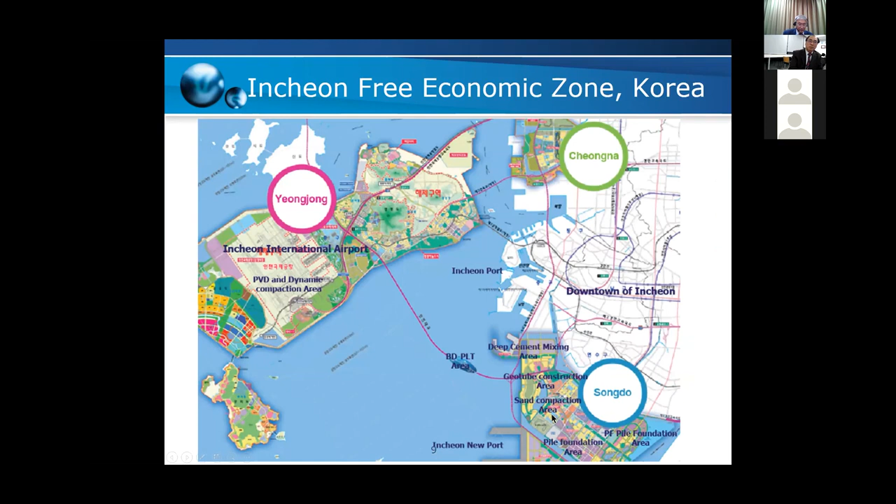We have the criteria of the soft ground here. All this area, the airport area, and the Songdo area I'm talking about, is all man-made land. We had a lot of ground improvement work, which began in 1992 and 1994, so in the past 26 years we reclaimed the land from the sea, like here. Now we have a very big dredging ship working in the midwestern part of the Korean peninsula.

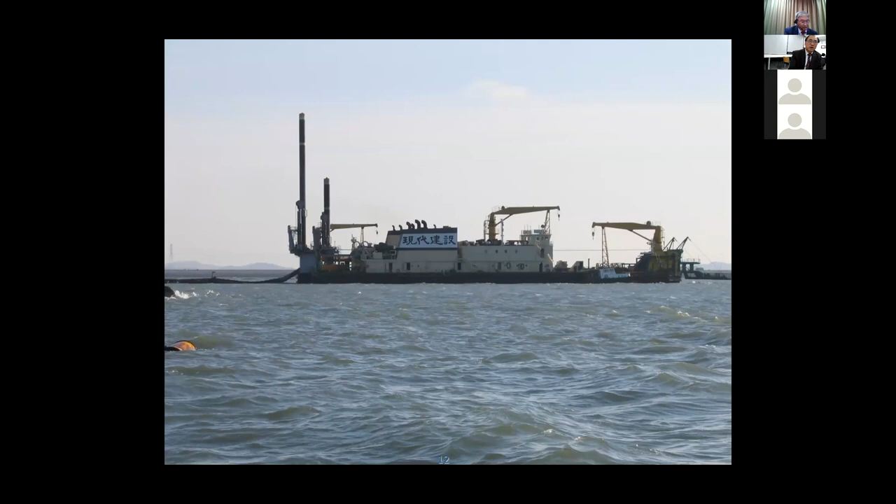We have the Saemangeum area, where we did some consultancy work. We have a lot of settlement problems in this land. This is a dredging pipe used to put the dredged soil inside the dike.

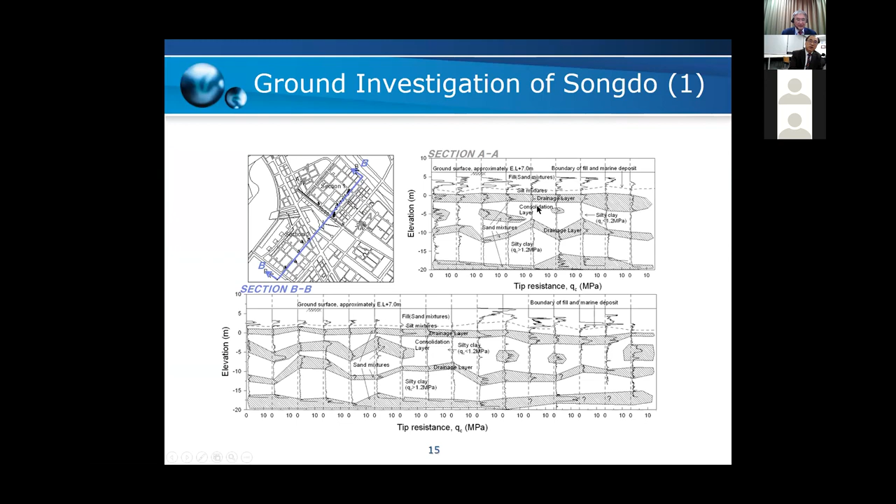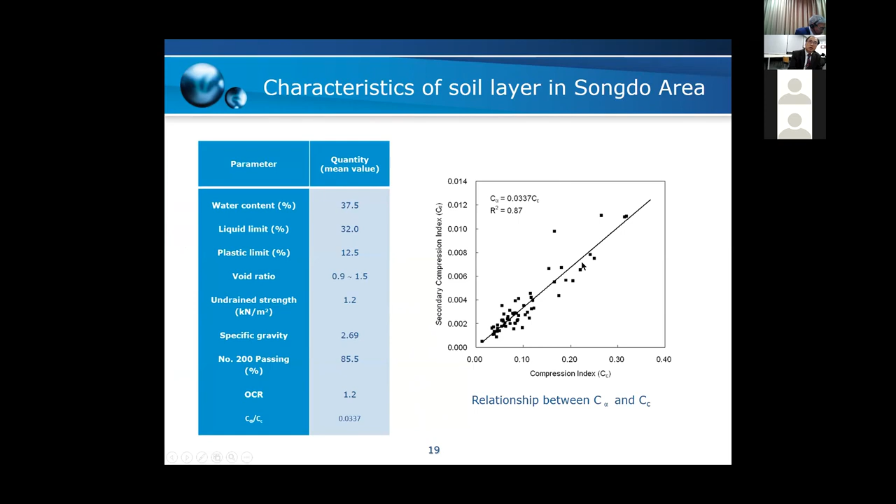So we have various ground improvement work: deep cement mixing, geotube, sand compaction pile, and special foundation systems, PHC pile, and point foundation system, and so on.

Here we have a PHC pile, high strength concrete pile, for the foundation of this northeast trading building, and we have a kind of bored pile, this is the United Nations building, the G Tower we call it, and like this. Because we are constructing in the middle of the city, we don't have any driving pile.

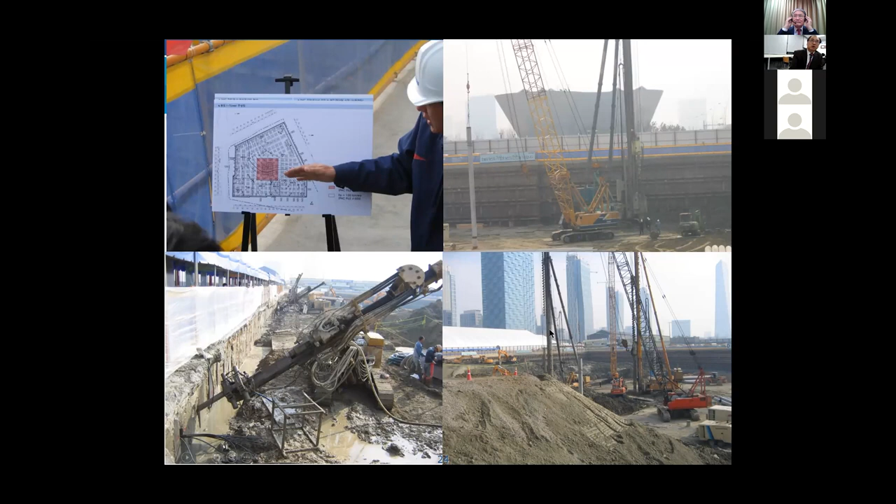So this is the water main, and this is maybe hot water heating pipe, and this is electric cable underground. So we have all this facility underground, so we cannot see any electric post above ground, and we have many CCTV cameras, so we can surveil any damage, any problem underground. So we monitor this lifeline facility 24 hours a day.

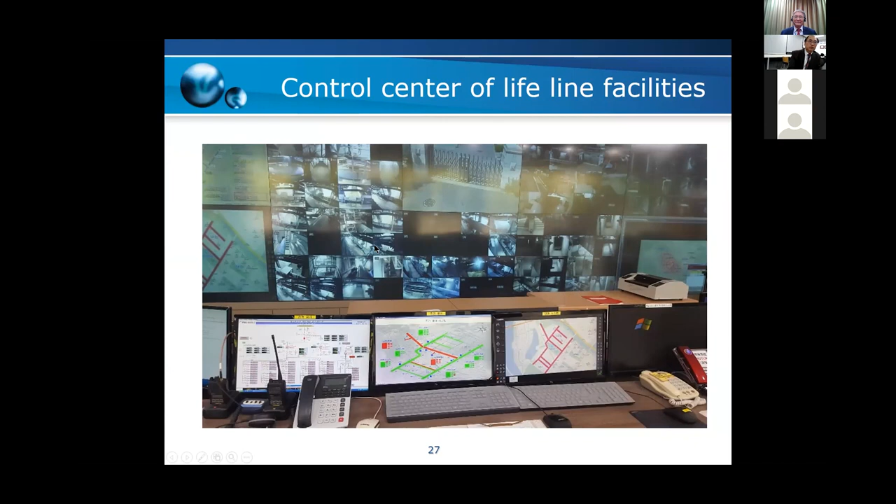So this is, and also we have several sand compaction piles, prefabricated vertical drain, ground improvement work in this area, and we ground improved, and also we have a geosynthetic clay liner at the bottom of this canal, this man-made canal.

And on top we have like a geocell. So we made an artificial slope for this particular Central Park area. This is a concert hall. And we have a pretty good shopping mall here and there, and also the international schools.

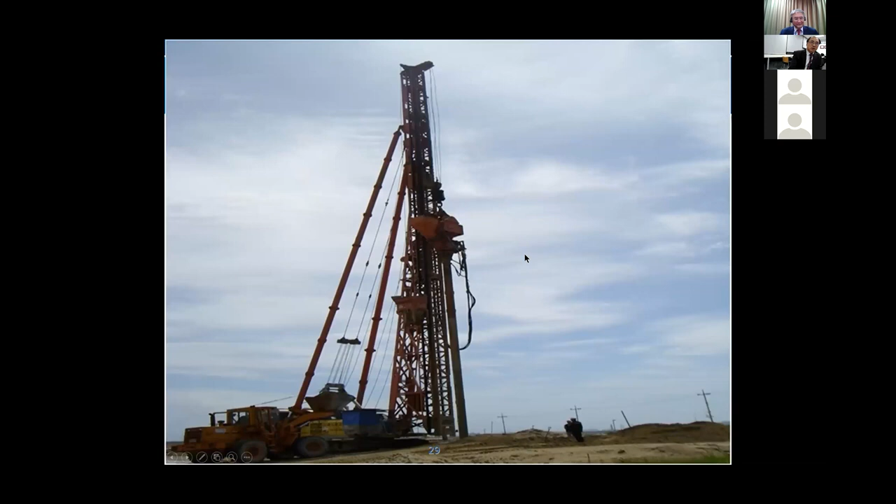And in those areas, we ground improved by the sand compaction pile. Many years ago, about 30 years ago, we learned this technology from Japan. You see the diameter about 60 to 80 centimeters, with spacing about 1.8, 1.5, 2.0 meters.

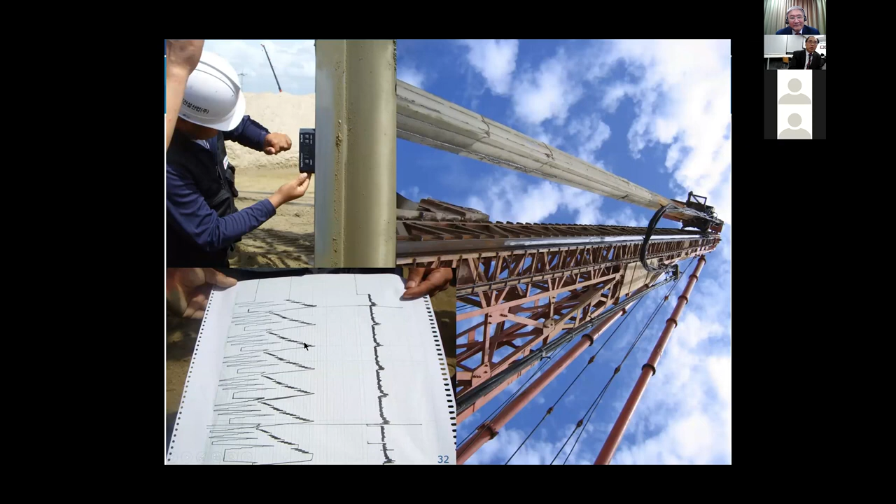And the depth of this ground improvement is around 18.5 meters average. Okay, this is the equipment and monitoring graph.

And also we used a lot of prefabricated vertical drain because of the lack of sand, because in here we have a silty sand, so not much good gradation of sand for sand compaction pile. So we use the prefabricated vertical drain and lateral, and also we used this deep cement mixing method for

jet grouting work under the station of the metro, and also RJP and JSP we used a lot for this area.

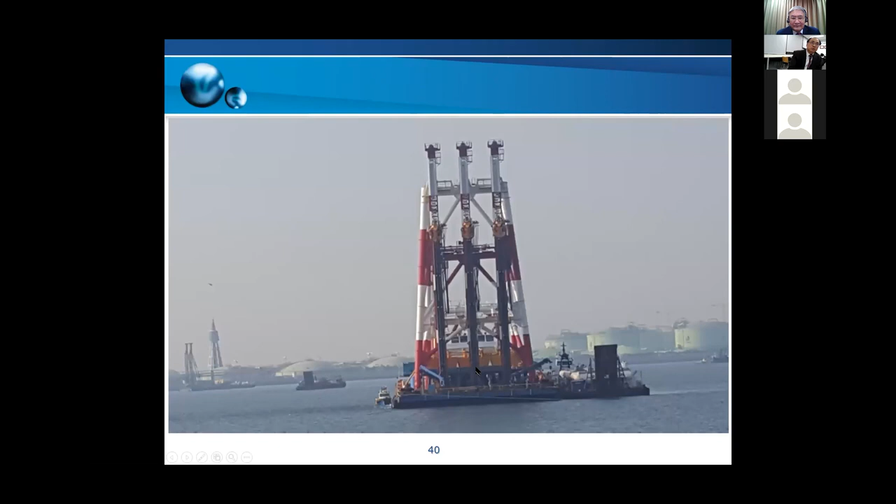Just prior to the construction of the sea dike, we wanted to ground improve at the bottom of the soft clay at the seabed, and we also have a lot of deep DCM application here.

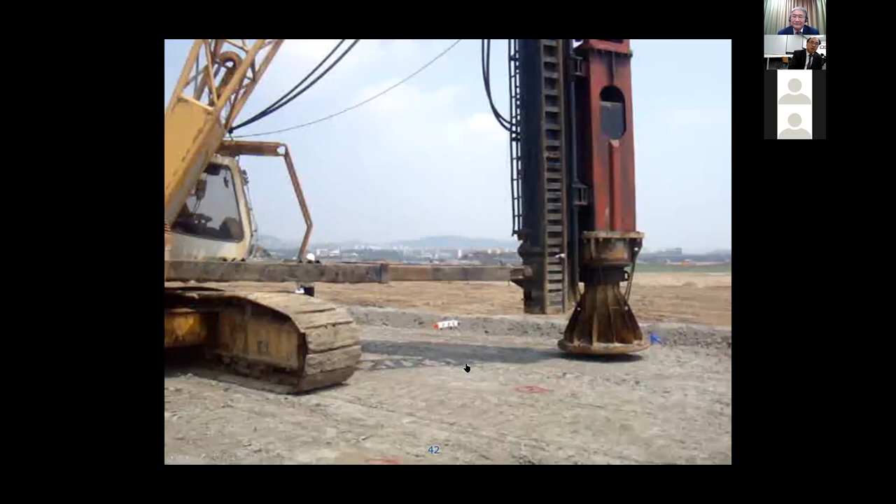This is the convention hall in Songdo, and this is a shallow dynamic compaction for the road, because deep dynamic compaction has a problem, too much vibration and noise. And here we have ground improvement of 5 meter depth by the shallow ground improvement method.

We have a point foundation along the international university campus here. We have here very simple equipment, but we have this kind of foundation. This is the tip and this is the top.

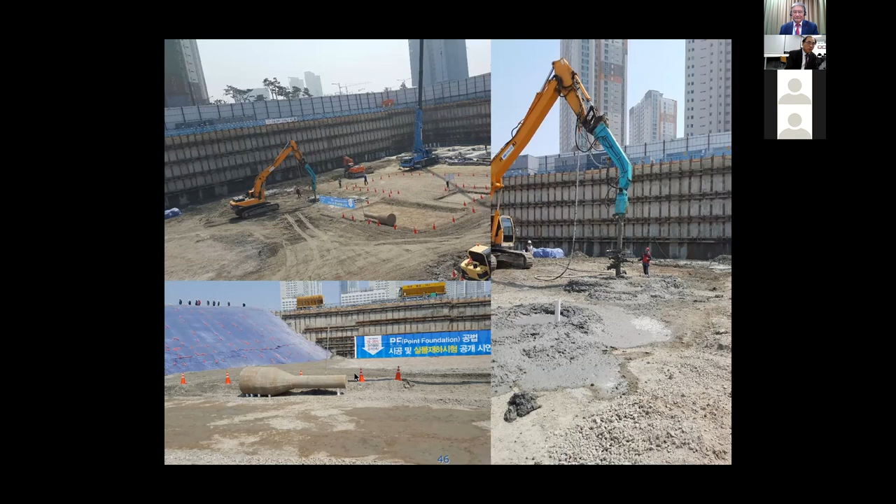Okay, so here the bearing, we normally just check the standard penetration value, about 15 to 20 blows in those areas. Now we do pilot tests over here to see the bearing capacity of this.

I think this would be very good for the foundation for the soft ground in the parking lot, and also the middle-high, low-rise apartment complex and residential area.

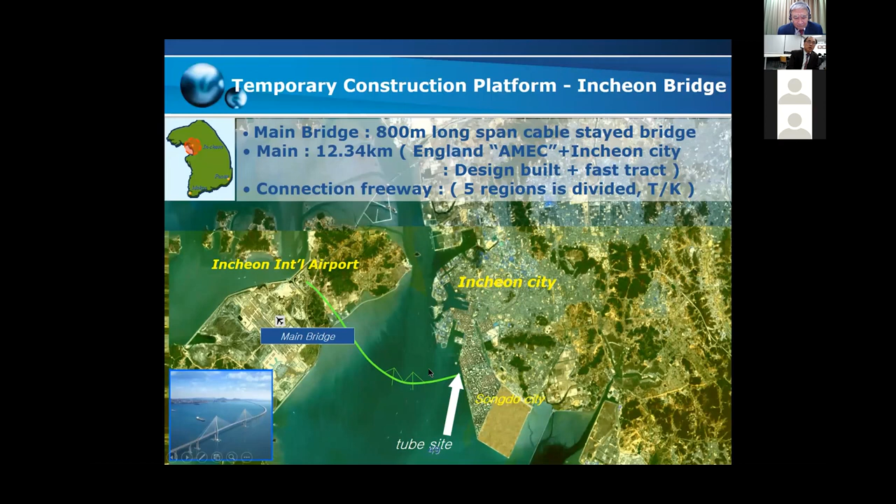This one has a conical foundation because the water dissipates during construction on the underground structure, it has a problem. We used the geotextile tube for the temporary dike for this bridge construction work, for the bridge pier and all these.

Used to be we used sheet piles to make a temporary dike, but in this case we used the geotextile tube, in 3 layers.

We monitored this and calculated the stability, the sliding, overturning, and the bearing capacity. This is the process of the construction work, the apron mat and setting, and we pumped the slurry sand into here like this. It's not very difficult.

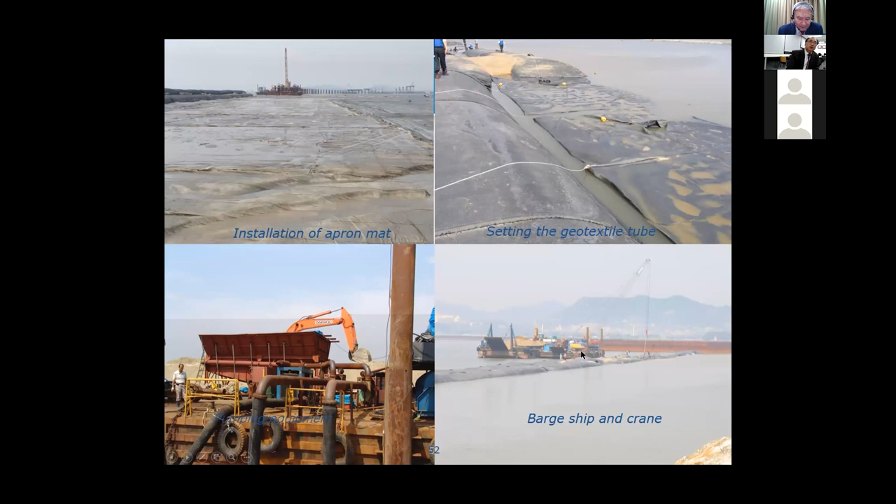Here we have a twin tube, and on top we have a mattress, and we injected cement milk to make a platform of the second layer. This was very successfully implemented, monitoring all the vertical stress and the pore pressure dissipation with the different layers.

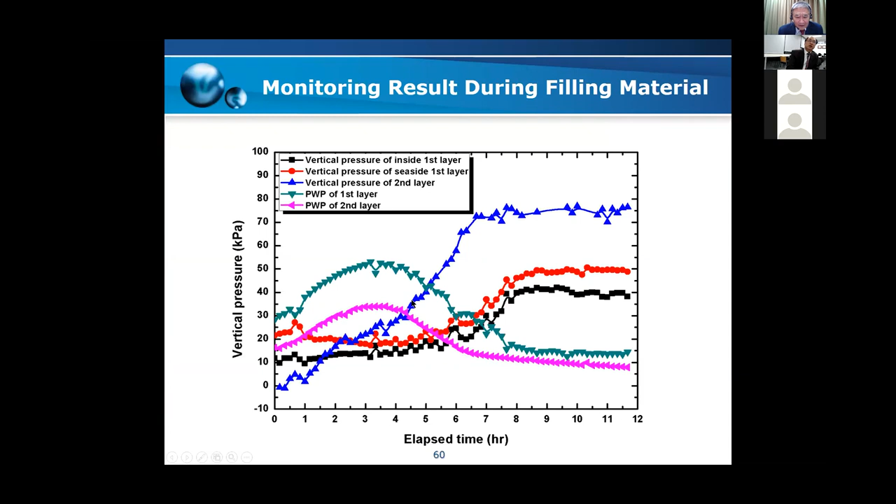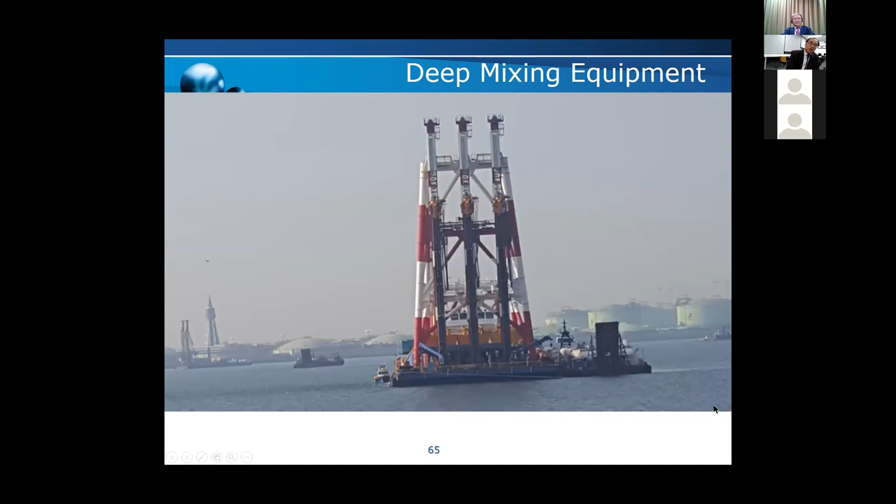This is the deep cement mixing at the bottom of the sea dike, and a secondary perimeter highway will be constructed around the metropolitan area. This is the method of the construction work.

We have two injection holes, bottom and top. When driving, we inject from the bottom, but when withdrawing, we inject the cement grout from the hole on top.

That's very efficient. This is a lift-up injection, and it's very good, giving a higher unconfined compression strength compared with the penetration injection.

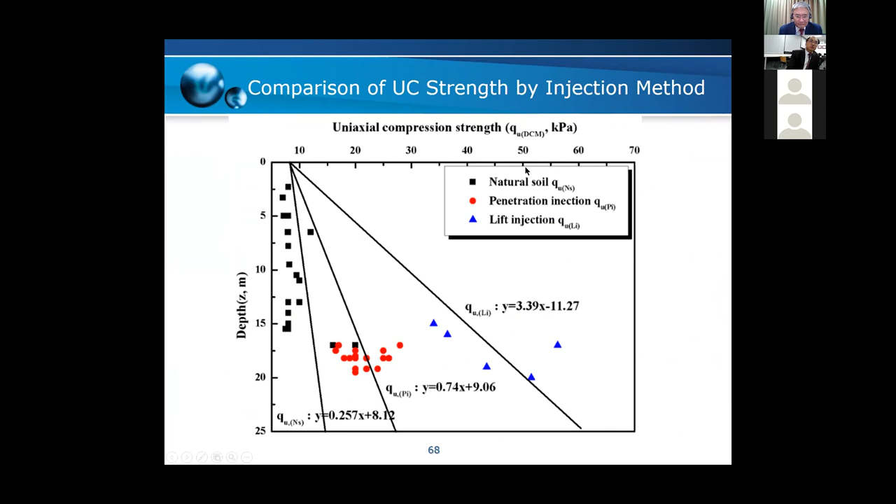The curing period is 28 days. We presented the various soil ground improvement methods, and I think we have pretty much confidence in the cost effectiveness of this method for social infrastructure in the Songdo area. I think that's about all for the presentation.

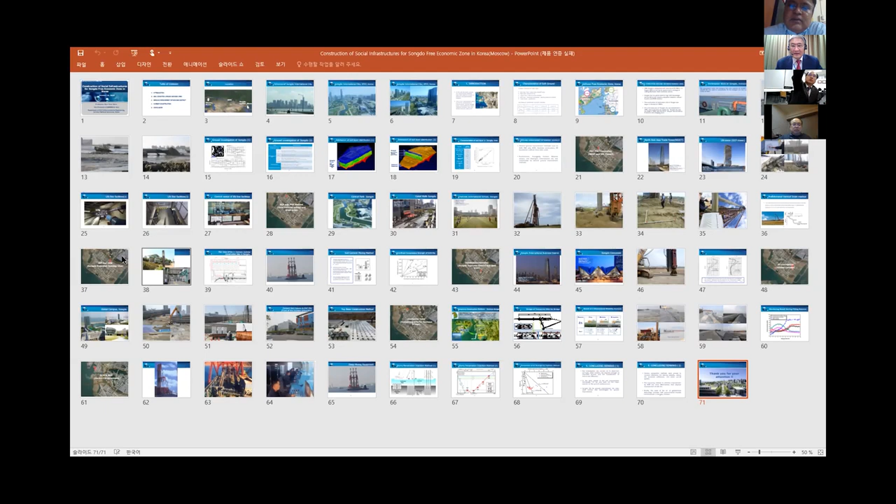Pile foundation? Yeah, we have pile foundations, PHC piles, particularly for heavily loaded buildings, heavily loaded structures.

I'll show you. We have a main contractor, right? Then they give the subcontract. They have some company that specializes, they have machines and technology to do this. So we have a special contractor, a Korean company working for this project. Whenever we have a project, we need the special subcontractor to carry out the work.

One more question. We have a ground, particularly when we have pile foundations in soft clays, how do you increase the lateral capacity?

Normally in South Korea, we have the depth of weathered rock, and it's not very deep. We have about 15 meters, maybe 10 meters, and in this coastal area, particular area, we have about 28 meters depth. So all the piles rest on the bedrock, so it's very reliable.

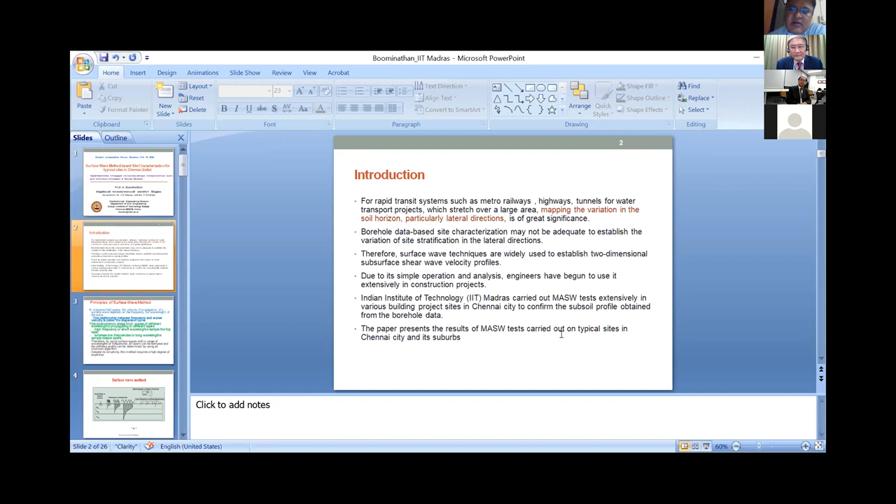My presentation mainly covers work carried out on typical sites in Chennai. Let me first introduce the principle of the surface wave method. Our soil medium is treated as an elastic half-space.

When surface waves propagate—here we are talking mainly about Rayleigh waves, or R waves—the velocity depends on the frequency or wavelength of the wave. This relationship between frequency and wave velocity is called the dispersion curve.

This phenomenon arises because when the Rayleigh wave travels, it has several frequency contents. For example, high frequency content, or short wavelength, samples the top layer. When the frequency content is low, the waves have longer wavelength and basically cover the deeper layer.

So we have waves propagating at a wide range of frequencies, and from that we can indirectly determine the soil stratification. In addition, we can determine the velocity profile, which is useful particularly for seismic site classification as well as seismic site response analysis.

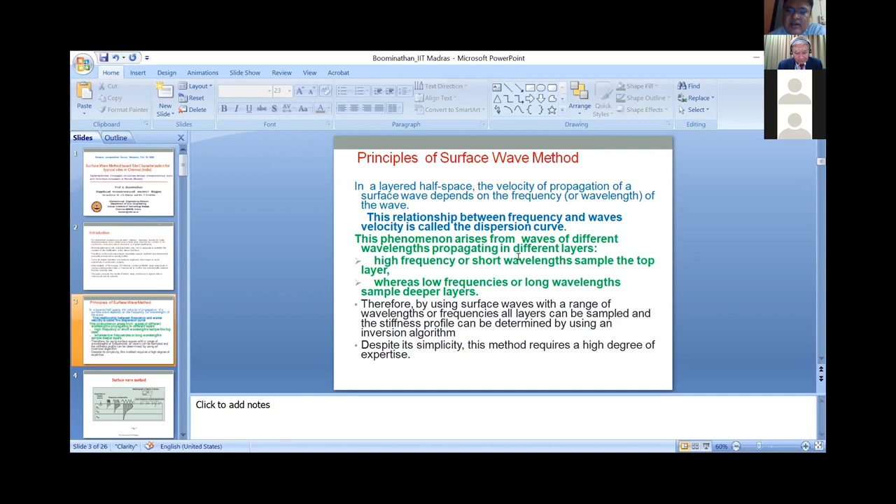My focus is mainly on site stratification. Here it's shown that the Rayleigh wave can be generated just by an impact, such as hammer blows, or an SPT hammer blow can also be used.

This wave has components with high frequency and some with low frequency. The high frequency content only covers the shallow depth layer, but the low frequency, or long wave, covers deeper depths.

From this principle, when we have multiple vertical geophones catching these waves, in principle we can indirectly determine the layer velocities as well as, importantly, the thickness of the layers. That is what we are interested in.

Practically, we are talking about how you can replace borehole-based stratification. Here you can see that this high frequency wave only covers a very shallow depth, less than a meter. But when we have a larger wavelength, it covers a deeper area. Based on that, we arrive at the stratification.

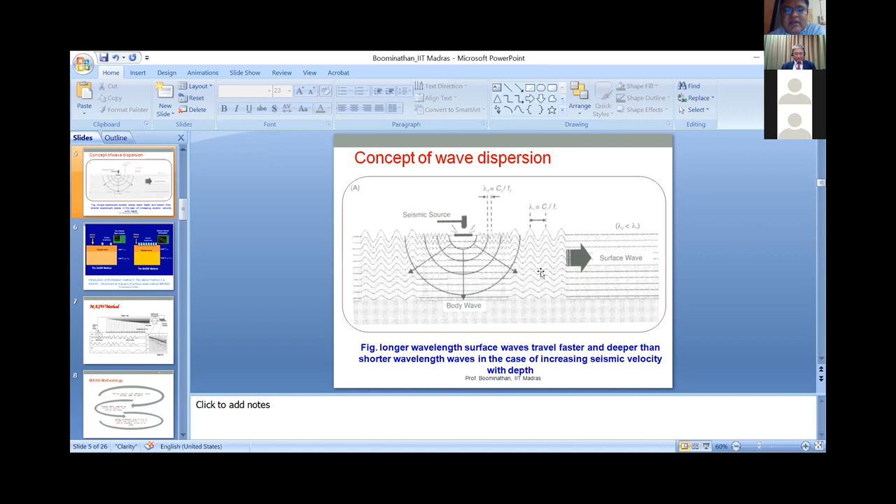This method was all developed at UT Austin by Stokoe and others. Initially, they called the test the Spectral Analysis of Surface Waves, because it is based on analyzing the wave's frequency content—hence the name.

Originally, they used only two vertical geophones and one vertical source. It was originally developed mainly to determine the quality of pavements, and only later was it extended to the geotechnical engineering field.

Nowadays, instead of two geophones, they use what's called 8, 16, or 32 geophones. Currently we are also buying a 42-channel system. With more channels, we can more accurately get the layer profile and assess greater depths. So currently we use the MASW test, the Multi-channel Analysis of Surface Wave method. Both methods are basically the same, but MASW uses a much larger number of geophones, as shown here.

So we have, for example, here typically 24 geophones. Each geophone is a low frequency geophone, for example here it's 4.5 hertz. Basically, the important parameter is the distance between the geophones as well as the offset distance between the source and the first geophone.

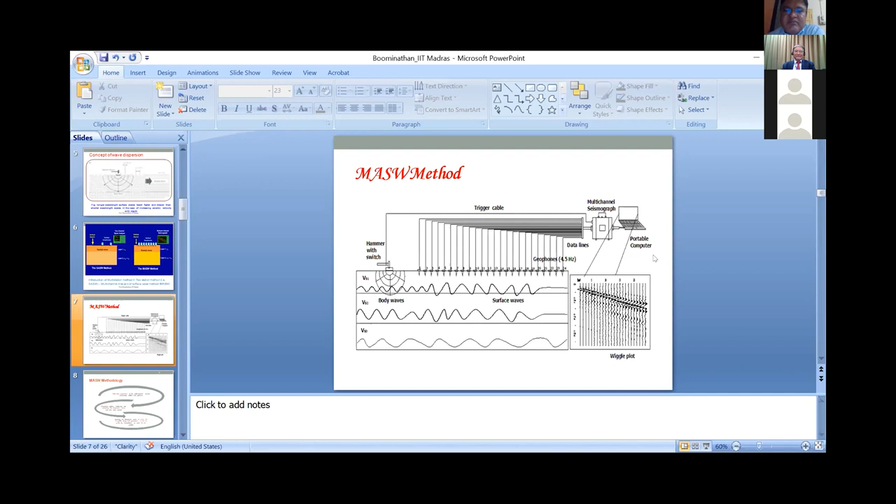So basically, in this method, first we are accessing the field multi-channel records, commonly called shot gathers. Then we are analyzing the dispersion pattern, extracting the dispersion curve we have to plot, showing the relation between velocity and frequency. Then by inverting the dispersion curve, we can get the shear velocity profile, and based on multiple locations, we can also get a 2-dimensional profile.

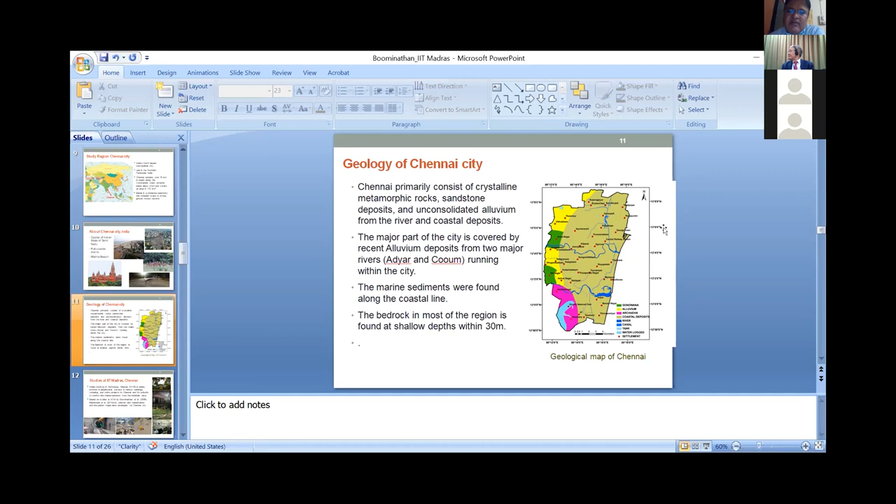We currently have our institute involved in geophysical surveys, particularly using the MASW test. We've been involved in tunneling metro projects to confirm mainly the borehole data. This data supplements the borehole data; of course, it's not replacing it, it's supplementing it.

Here, what we have done, the test was carried out for the first time in Chennai, about 30 sites, and we also collected samples and did some laboratory tests to determine the shear velocity, like the Bender element test. For all the sites we also had additional borehole data plus standard penetration test data. So from 200 data points used, we developed a correlation between the shear velocity and the SPT value.

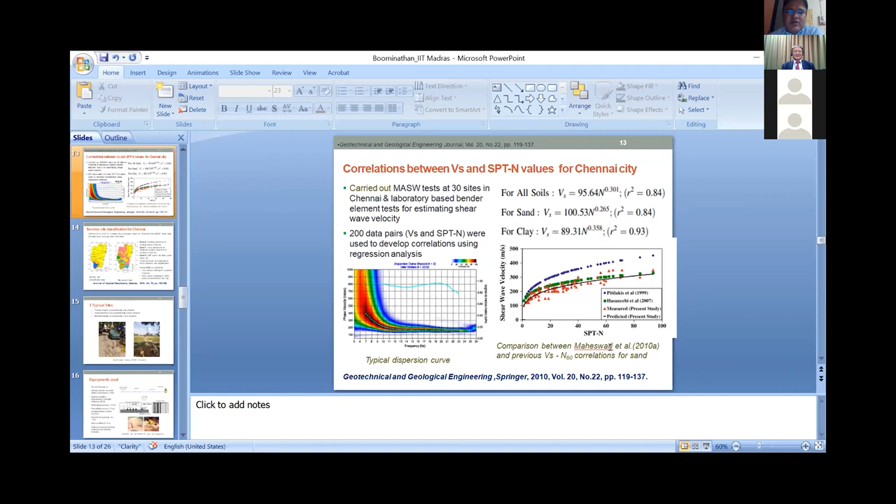So based on this site classification, we have concluded that mostly the short buildings are vulnerable to the earthquake. One single story or double story building in the southern part. The remaining part, mostly 3 to 6 story buildings are vulnerable in case of any occurrence of the earthquake.

So now after that we are involved mainly in seismic site characterization. For that we have collected data and done various tests. But nowadays our purpose is mainly to have more detail about the site profile. It's not that we are not interested in the shear velocity profile, but mainly we are interested in the site profile. For that we will be taking this particular presentation.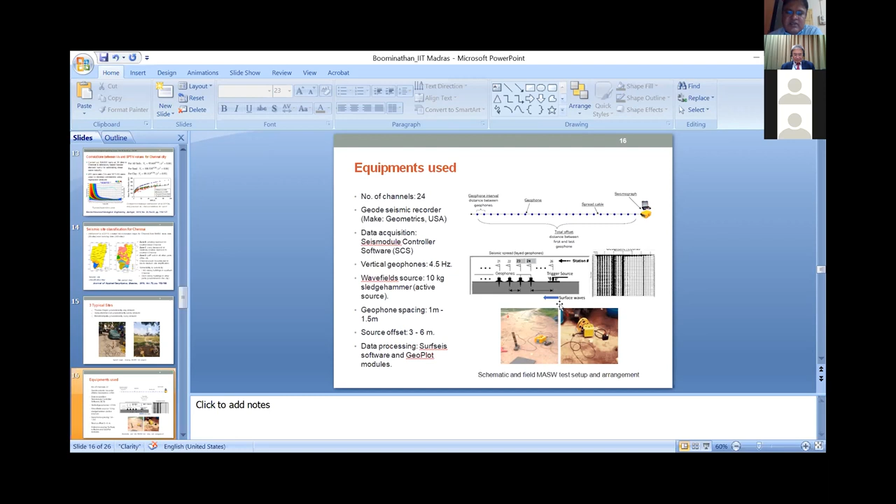Of course, all this we have to select carefully. It's not that automatically we get a good record. We have to change the spacing as well as the offset distance to get good wave data. For processing, we have used Surfseis software. Currently, a large number of software are available in the international market to analyze this wave propagation and S-wave velocity data.

So basically there are 3 parameters involved. One is the offset distance, which is the distance from the source giving impact to the first geophone. Then the distance between geophones, then the overall distance. These are the 3 distances. If you look more clearly, one is D, the other is X, and L is from the first geophone to the last geophone. The optimum and important task here is how to select these dimensions, D, X and L.

For that, there are various recommendations. The spacing between geophones should be less than 0.1 times the maximum depth of interest. In some cases we are interested only in studying, for example, pavement purposes, so we may be interested to know only within 5 meters. But for our building purpose, we may be interested up to the rock. So depending on the desired maximum depth of investigation, we can arrive at this distance. Similarly, the offset distance should be more than half of the maximum depth. Then the overall length of the geophone array should be more than the depth of investigation.

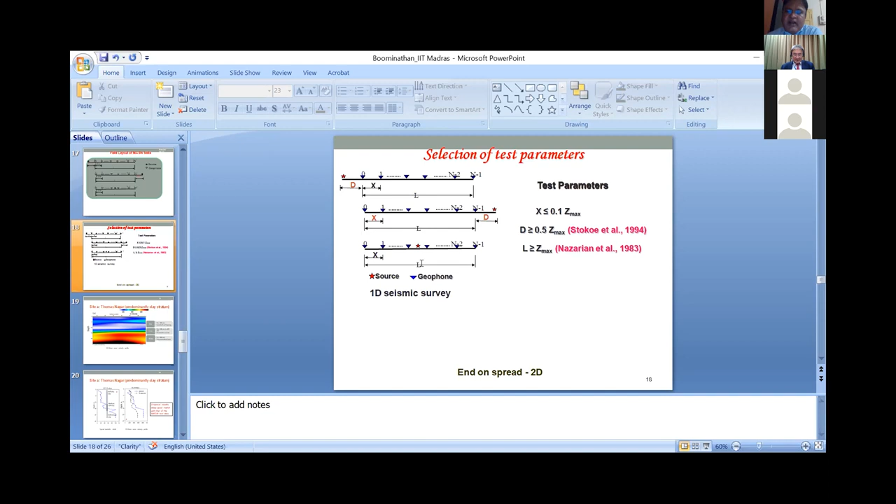So these are the considerations. There are later studies also with various recommendations, but we cannot blindly follow these. Depending on our site condition, we have to select these 3 parameters. I already told you the parameters which we used for our case.

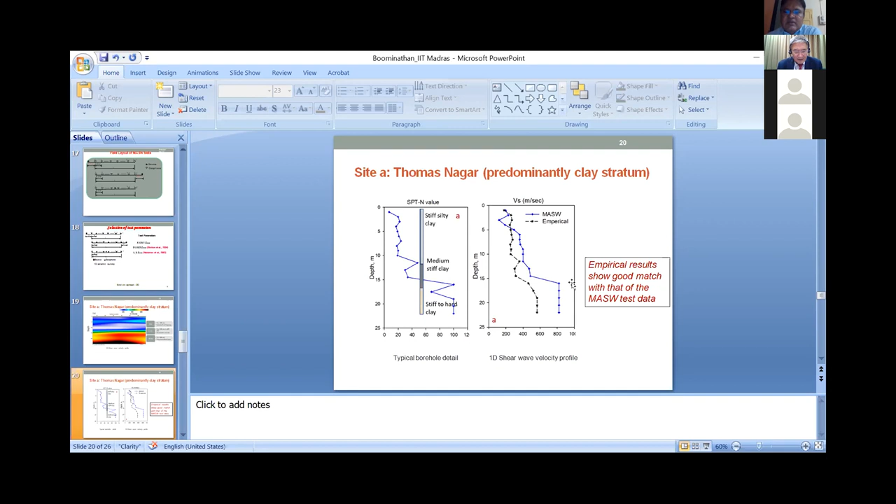Additionally, we compared the earlier correlation proposed by our group itself to see how it works. The empirical result is basically, the blue color is the test result, the black dotted one is the empirical one. It's giving results but it's not exactly matching, particularly for very stiff soils actually.

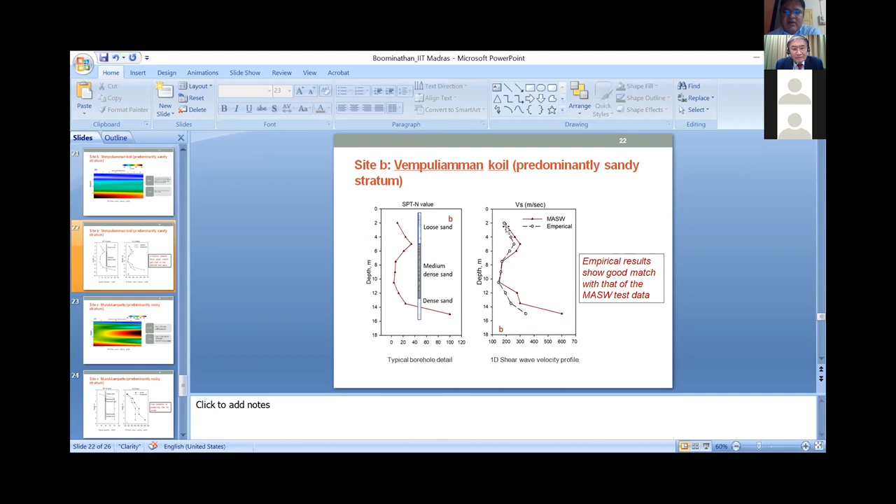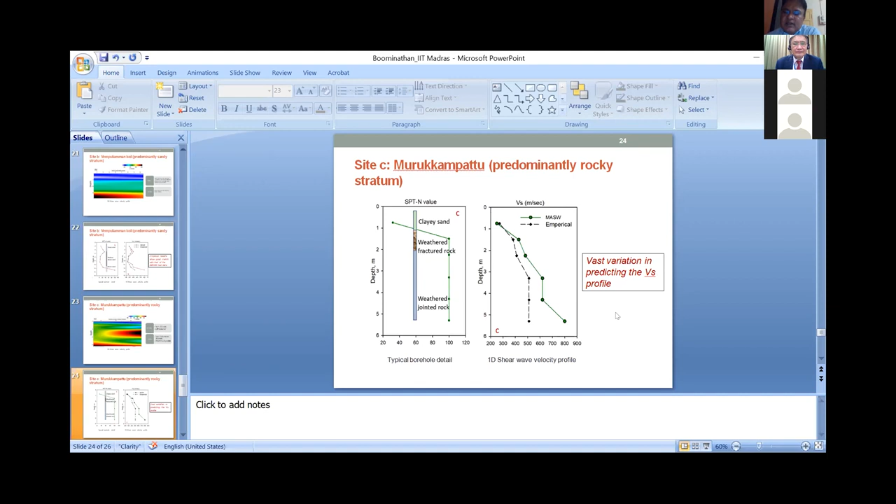So with this, I will complete my presentation.

So what we find is, for the subsoil profile obtained, this test reasonably matched with the borehole data, and it will give additional information. The existing correlation developed by our group can be used for certain types of soil, but not for all types of soil actually. Particularly for weathered rock sites, the correlation may not be applicable or adequate.

So future research should focus more on how to develop a relationship between SPT or some other parameter with the shear velocity for weathered rock, and our focus is how to distinguish. Of course, the hammer blow energy may not be adequate. Further, we may go for high energy impact systems at commercial level to reach greater depth, so that even beyond weathered rock, we can reach the hard rock actually.

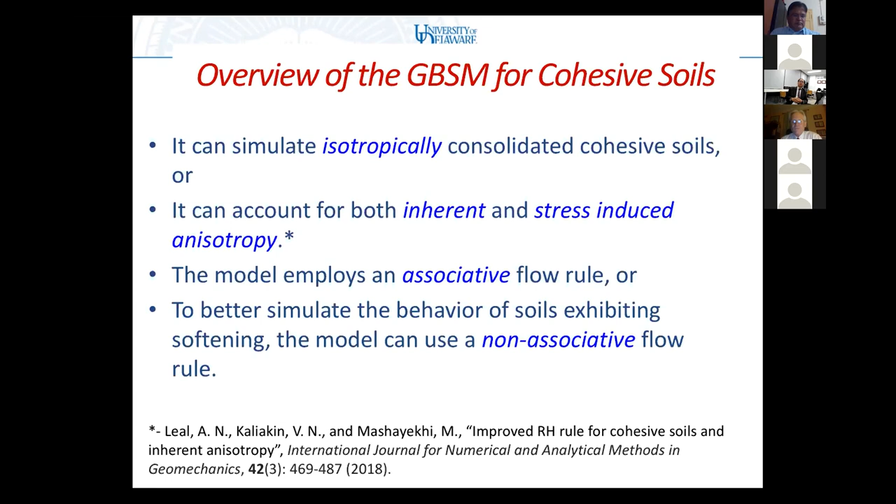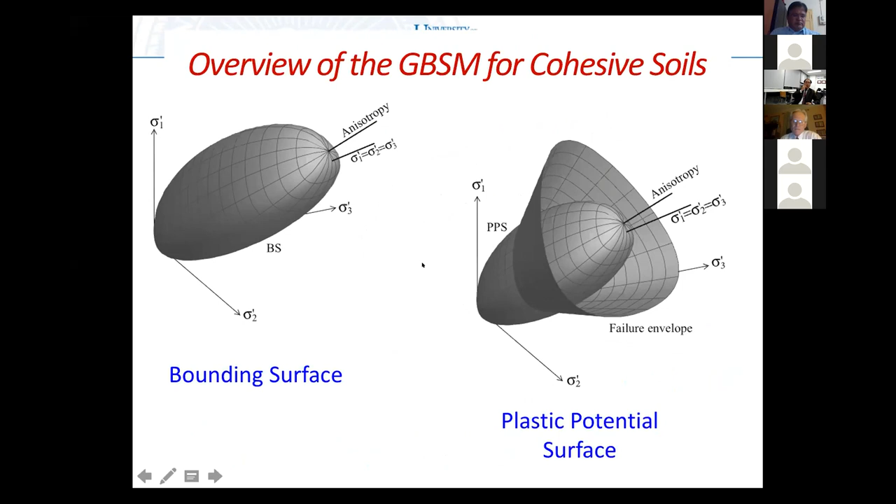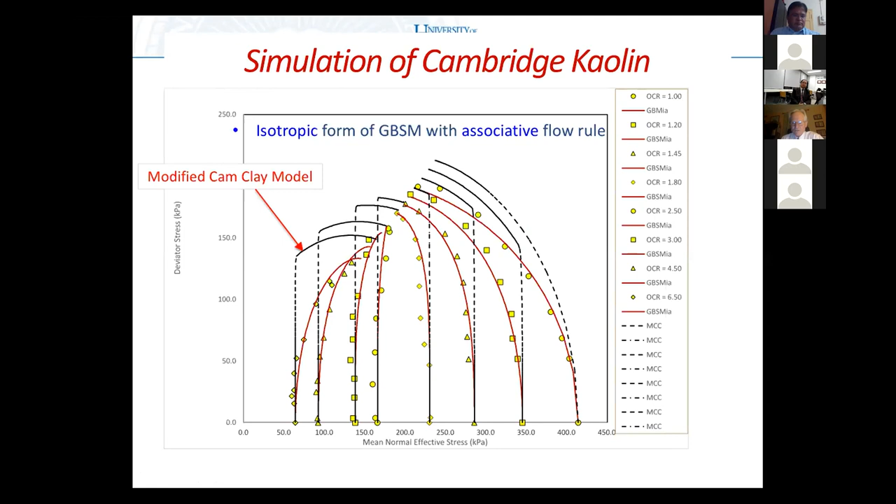Now, that was a simple soil. Let's look at some more complex soils. Boston blue clay is a famous soil in the Boston region in the eastern part of the US. It's marine silty clay, and it exhibits strain softening.

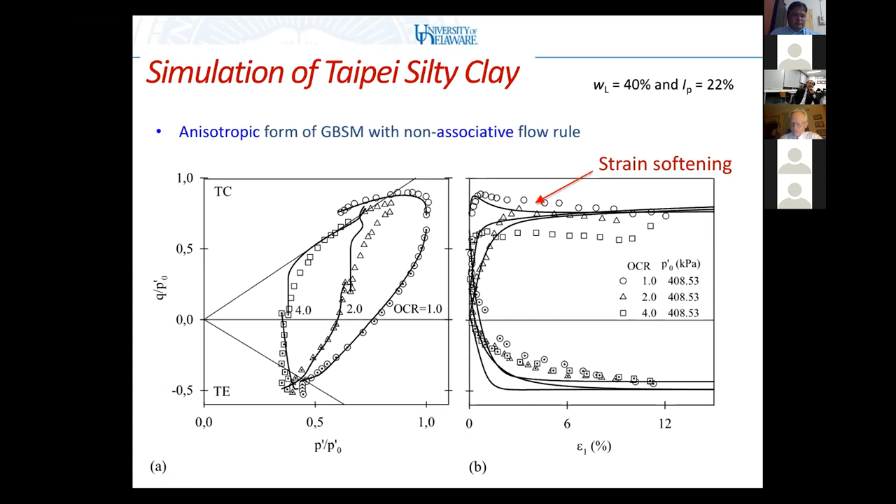Now, the interest in the elasticity response is motivated by recent work, maybe over the last 10, 15 years, on tunneling. In tunneling, small strains are very important, as shown by numerous authors. So the definition of your elastic response assumes greater importance in such applications, tunneling, and also certainly in foundation work.

So we look at the existing relationship between stress and volume change. Volume change is done, of course, through void ratio, E. Here is the classic critical state concept of E log P curves, where P is the mean normal effective stress. The slope of the virgin consolidation line is the negative of lambda, and the slope of the swell recompression line is the negative of kappa, a classical kind of approximation. We use the same type of approximation in our work.

Traditionally, we decompose the rate of void ratio into elastic and inelastic parts, the inelastic being both plastic and viscoplastic. From the previous plot, we know that the change in the elastic piece is related to the change in the first stress invariant, I, which is 3 times P, through kappa. In the limit, when we take derivatives, we have the log entering, and then if we take rates, this is just equal to negative kappa I dot over I.

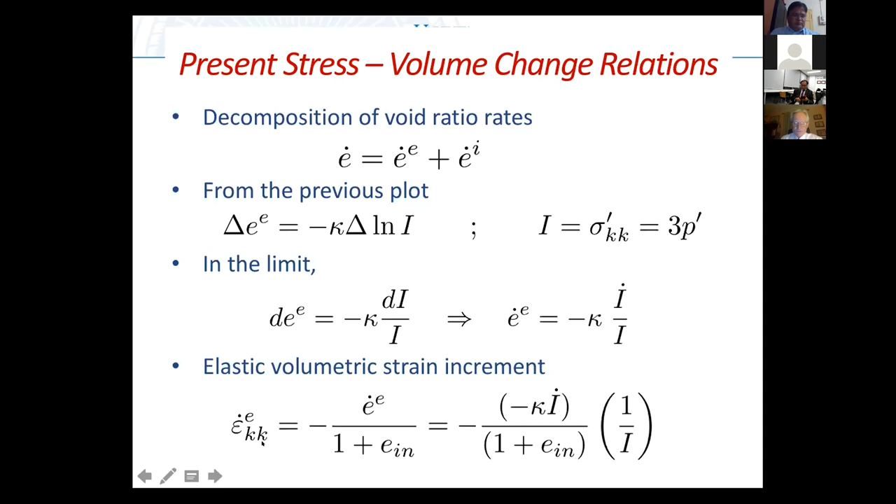And we set up the volumetric increment, the elastic volumetric increment, in terms of I and I dot and void ratio. Then we look at, for isotropic elasticity, the relationship between I and I dot and the volumetric elastic piece through the bulk modulus, of course.

Substituting the expression from the previous page gives us this kind of relationship where we rewrite things in terms of void ratio and solve for the bulk modulus, getting the classic relationship between bulk modulus and I, or in critical state soil mechanics written as 3P, and the initial void ratio and kappa. This is very classic, or you can rewrite this as kappa related to the bulk modulus and I. It doesn't matter either way.

So this would be the elastic response, the bulk modulus. Of course, it's a function of I, proportional directly to I. For the second elastic parameter, because this is isotropic elasticity, it's typically Poisson's ratio, a constant Poisson's ratio, or a constant shear modulus. That's pretty simple and straightforward in critical state soil mechanics formulations.

And we use the same to relate stress and volume change. Now, this has to change because the more accurate representation of elastic response requires that we revisit the experimental work and then change this approach that we use in the model.

Professor Bumi just talked about field testing involving determination of shear wave velocities and so forth. This is traditionally the way moduli in an elastic range have been determined, both in the lab and in the field. In the lab, resonant column tests beginning in the 1930s, developed in Japan, were expanded, forming a way to determine elastic moduli through torsional vibrations.

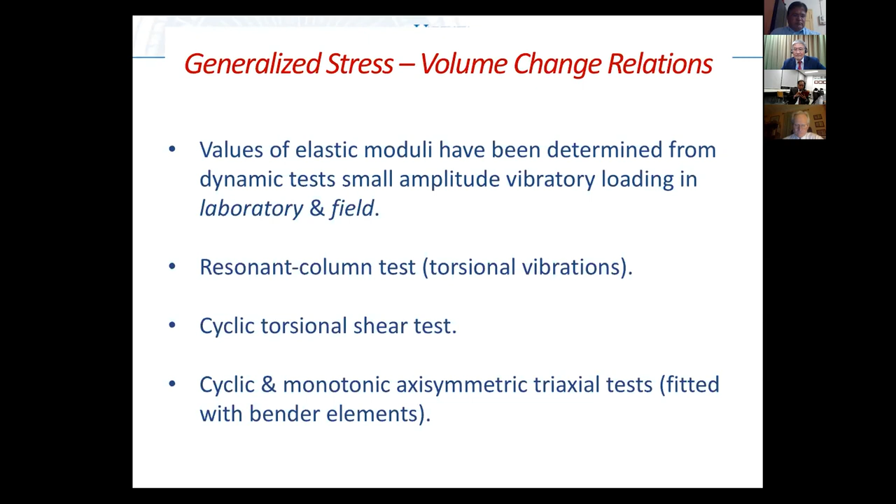This evolved into cyclic torsional shear tests, and now cyclic and monotonic axisymmetric triaxial tests, typically with bender elements. This is work that was especially pronounced in the 1990s and 2000s in Japan, to better understand how the elastic parameters varied at very small strains.

And so it's now realized that the expression I had before, where a modulus such as the bulk modulus is proportional to I, is really not consistent with experimental findings. These findings show that moduli, typically shear modulus, is a function of many things, but most importantly the three things I show here in the bulleted items: state of stress.

Obviously, the state of stress has an effect on the modulus, we know that. Density, though, void ratio is typically used to quantify density, and certainly stress history.

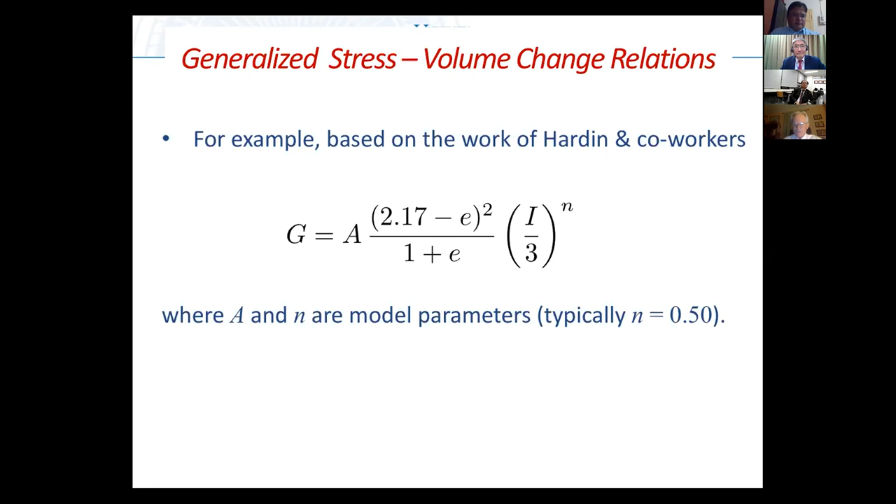So this is a complete rethinking of the elastic response as we see it in the model. So what do we do? Well, we assume, for example, under isotropy, that G expression that I just showed and a constant Poisson's ratio, and we compute then the bulk modulus by the elastic relationship between K and G through Poisson's ratio. But instead of G, we now have the variable formulation in terms of I to the n, and A is another model parameter, and it certainly becomes a more complex expression.

But we recall that we can relate kappa, the previous kappa, to bulk modulus, shown this way, except that it's not the original critical state parameter kappa, but what I call kappa tilde. It's an equivalent swell recompression index, where K is this K now, with a variable G, that is much better suited to experimental data and therefore would be much more accurate at small strains. So this is the approach that we are using now to recast elasticity as we have seen it before. It's clearly nonlinear elasticity, but now rewriting it in terms of more rational formulations, not necessarily the standard critical state kappa type line.

Conclusions, because of lack of time: the model we use, the generalized bounding surface model, is a very adaptive approach for simulating saturated cohesive soil response, both isotropic and anisotropic formulations, associative and non-associative flow rules.

The adaptive approach is necessary especially in large simulations because not all aspects of, let's say, a soil deposit need to have the most complex form of the model. It can be adaptive, it can be very simple, it can be very complex, depending on the needs.

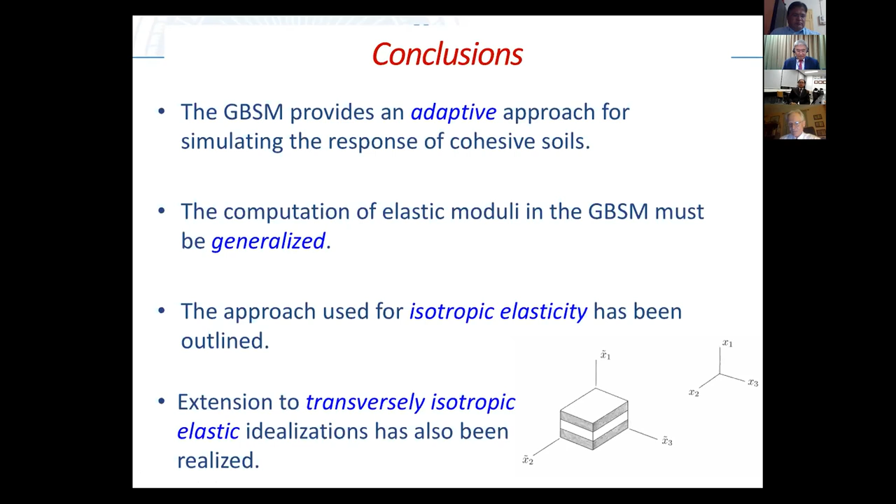The higher strain values I showed will be largely unaffected, it's the lower strains we're concerned about. Time precluded me from mentioning the extension to transversely isotropic elastic idealizations. You can see the cartoon of this typical transverse isotropic idealization, these planes of isotropy, the x2, x3 planes, and the direction normal to that having a different property. These have 5 elastic parameters, and it's still a very evolving area about how we quantify them. This can also be treated. I didn't cover it, but you can calculate this tilde kappa for transversely isotropic cases with the 5 parameters and apply the model when you're doing an anisotropic response.

With that, thank you very much for listening. I hope I did not go over my time.

I'll stop sharing. Thank you, Viktor Nikolaevich. Very interesting, especially the deep equations - no, deep mathematics, only 10 minutes. This is very good information, especially for presentations, especially for the young generation, not only for adult people. So please, some questions or some comments.

No questions from the auditorium or participants. So my question is, Viktor Nikolaevich, you showed us a special model of calculations and also demonstrations, and maybe also some examples, some applications. What applications can you use this model for?

Yeah, well, we have applied the model as it developed to laboratory results like I showed, but we've also used this to model, for example, a caisson infilled island in the Beaufort Sea, the Canadian Beaufort Sea, sitting on a soft foundation. We've done simulations with Professor Ling in Columbia, and a student, of excavations in both Boston, that Boston blue clay I showed, as well as in Taipei, the Taipei silty clay.

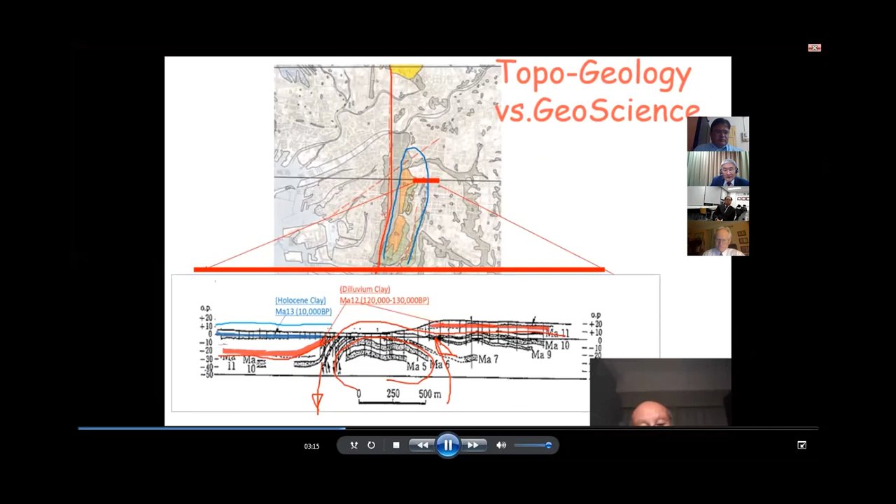Can you hear now? Topological expression of upland and lowland. As you can see, thank you.

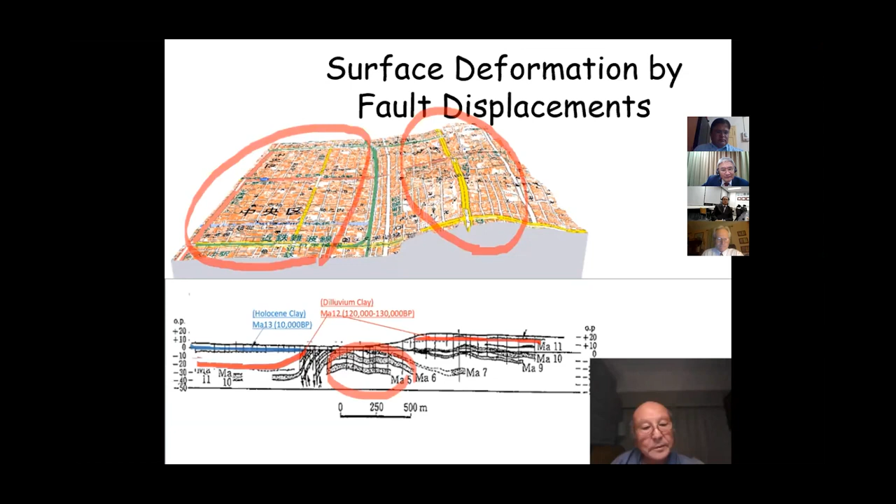In this area, this is upland, and here lowland, and in between the slope and underground we found faults. So this is the downgoing, this is upgoing movements. Here, this is the hill.

And this boring data is just north and south direction. You can see the upper formation is horizontally deposited. This is alluvium MA13, and MA12 is here, disappeared. The lower deposit MA11, this is the upcoming and disappears.

And in somehow these areas, geological professors are saying this might be the faults. So these faults are something like this direction.

So after the Kobe earthquake, Osaka city asked me to make some fault survey. So I just made a seismic reflection survey here.

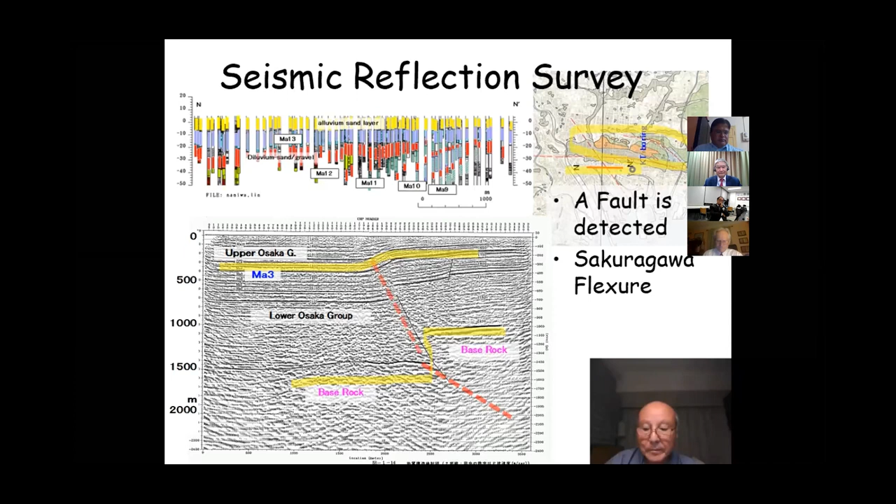So the fault displacement, the base rock is from the surface 1.5 kilometers deep, and the fault displacement is something like 0.5 kilometers, 500 meters. But at the surface, not like this abrupt displacement, rather just continuous deformation. And the width of this flexure is 0.5 to 0.7 kilometers.

Those are the boring data plotted points. And in the western side, this is a subsidence site, and in the eastern side, upheaving site. So this is the upheave, and these are the subsided. And here, these are the faulting area we call flexure belt.

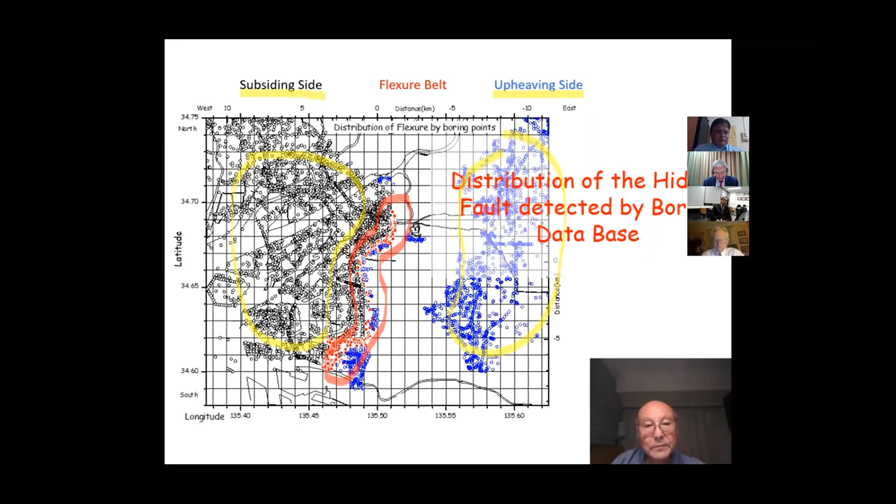The response of structures, if these faults activated - this is before the earthquake fault movement, the structure just stands upright. However, when the faults move, this area just deforms and the structure just inclines. And the inclination angle is about 2 to 3 per 100. This is good enough, strong inclination to make some damage to the structure.

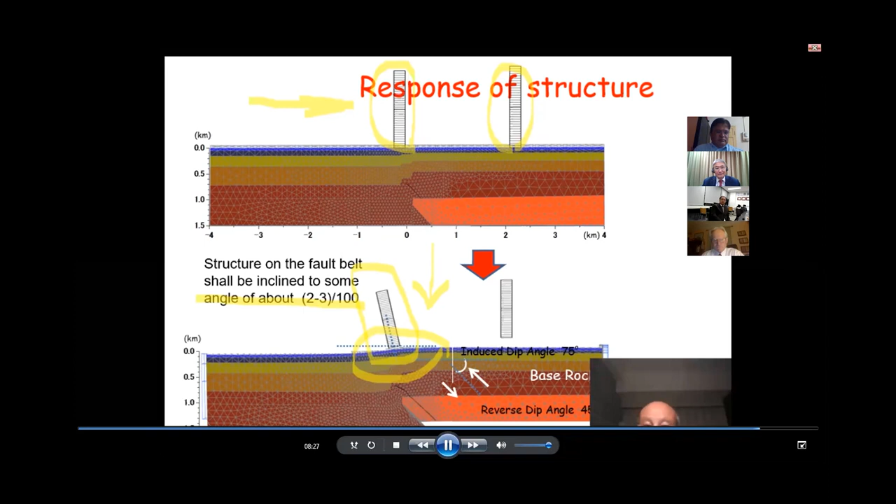Conclusions: Faults are usually associated with topological surface expressions, difference in ground heights. However, the fault movements are covered with flat surface and only discovered by seismic survey or boring database system. In Osaka, a fault and flexure system has been identified and warning has been made from geoengineering to the society.

Thank you for your attention. Yoshi Iwasaki, Geo Research Institute, Osaka.

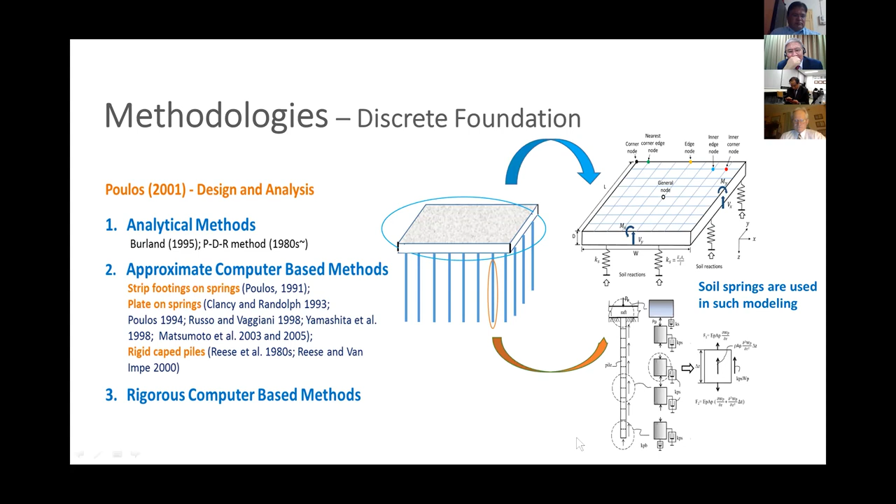So this is the methodology of the things. As you can see, for the 2D plate we just use thin plate theory, and this type of equation has been suggested by Poulos in his very famous textbook. This is the governing differential equation, and we use the finite difference solution to solve it. But in the beginning, I think in most textbooks people don't discuss the boundary effects.

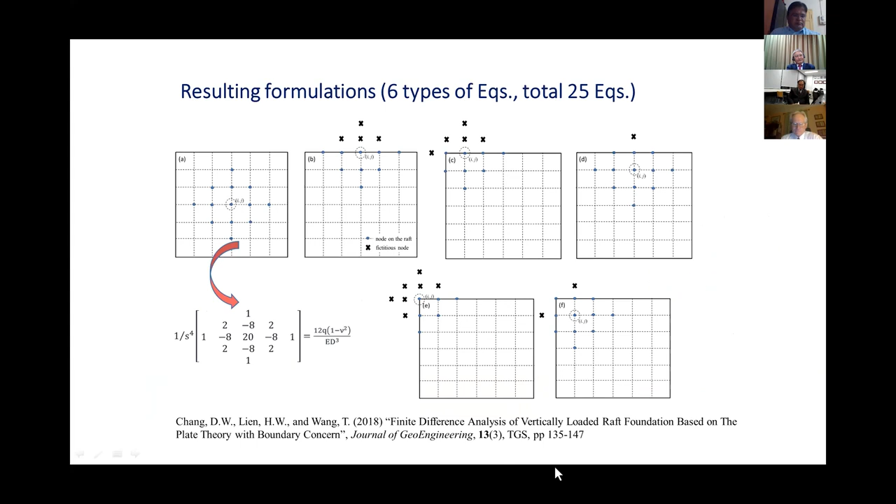For the foundation already solved, we must consider the springs - soil springs. For any type of foundation which has deflections, the springs underneath the foundation must be variable. It cannot be assumed as a constant, it's not going to perform as a rigid type of foundation. So this is what we try to suggest. We use the finite element method to check the things, back-figure what type of soil spring varies underneath the foundation, and then come up with this type of approach.

We assume this is a polynomial function, and with the normalized parameters we can assume this is a one-dimensional function, and in different directions they are the same. So once we have different direction functions obtained and derived, we can assume this is a two-dimensional function for the soil springs. So this is what we suggest in my study.

As for the pile, as I already said, we assume this is a single pile derived by the wave equation again, but it is static, so there's no time dependence in this type of analysis - only the static one. Once we have these things, we can also use the finite difference solution to obtain the equivalent pile stiffness of the single piles. So the equivalent pile stiffness is very important in my proposed analysis.

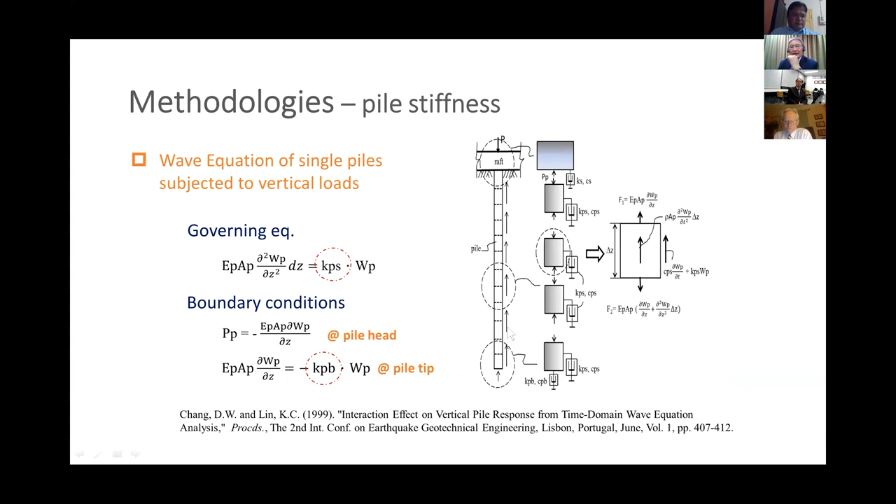As for the pile-to-pile interaction, what I adopt is I try to use the approximate pile-to-pile interaction factor suggested by Dobry and Gazetas in 1988. This is the solution regarding the vertical response of the things. As for the horizontal response, it's more complicated, but at this time we only consider the vertical response.

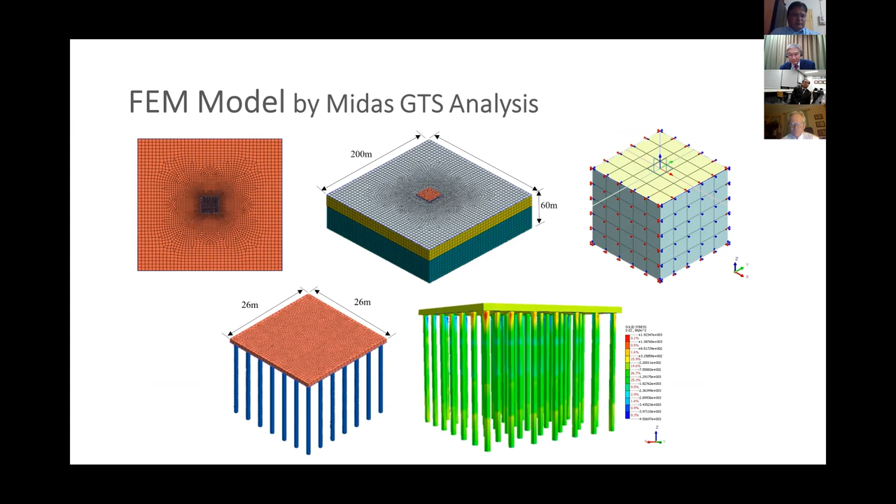And for the comparison, we use the MIDAS program. This is the finite element model we used, developed by the MIDAS company. It's a 3D program, and gives about the same solution compared to the Plaxis program.

Okay, for the comparison, we need to validate our solution, so we focus on the displacement of the foundation. As you can tell, we assume this is a uniform load acting on top of the foundation. The intensity is about 100 kPa, which is equivalent to about 10 floors building. As you can tell, this is elastic because in the very beginning stage, everything is assuming linear elastic. And as you can tell, this maximum displacement of the foundation is less than 2 centimeters, and it will be influenced by the shear wave velocity and also the spacing ratio divided by the pile diameter, which is called the S/D ratio.

And as you can tell, the solid line and the dashed line represent the solution between our proposed analysis and MIDAS, which means the analysis we propose works quite rationally. This is the contour plot comparing things to MIDAS, with our program we call WEAPR. This stands for the static, second version, which includes the variation of the soil stiffness underneath the raft, and also the pile-to-pile interaction between the piles.

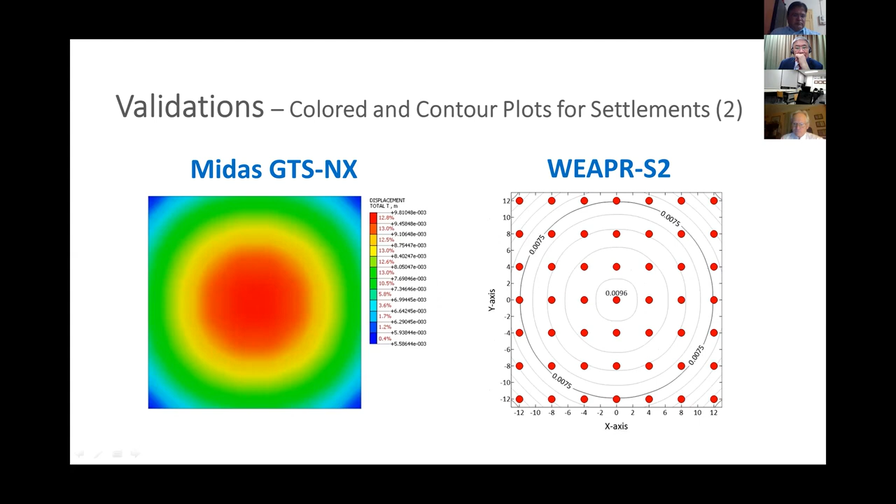And as the density of the piles increases, you will be able to see more variation. So we try to compare everything, doing some parametric studies. And this is for the displacement - we have an agreeable solution. So further, we want to check the load variation and also the pile stiffness obtained by our solution and also with MIDAS.

In this case, the dimension of the raft is 26 meters by 26 meters. The thickness of the raft is about 1 meter. So in this case, we have 49 piles, the pile diameter is about 1 meter, and we have a 20 meter pile length. So in this case, as you can tell, the pile stiffness between these two solutions varies a little bit, but they are in a reasonable difference.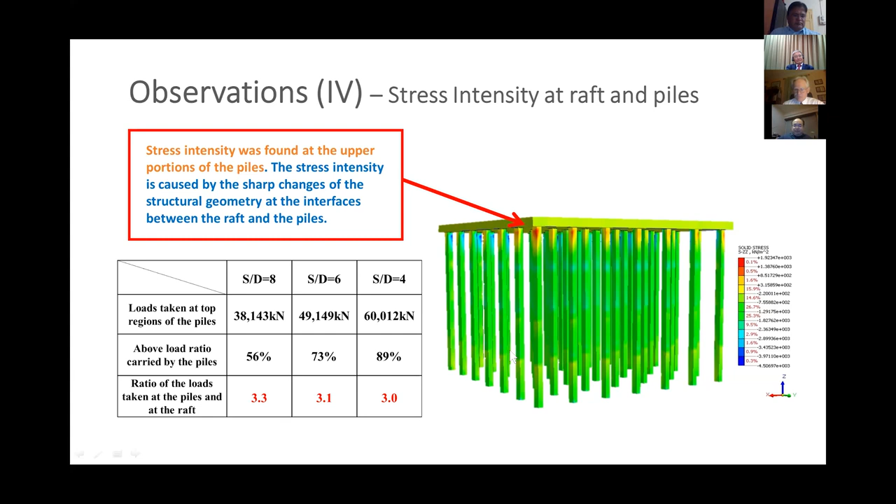So the conclusion is that for linearly elastic analysis, the computational time of the proposed analysis is very surprising - we find the finite element analysis is very fast if the soil is linear elastic. However, I think for nonlinear or even dynamic problems, the difference between the finite element method and the finite difference method is going to be dramatic.

Settlements and loads were found compared with the finite element solution, as I already shown you. The pile stiffness obtained from the soil strength model were found agreeable with the finite element. There are many different types of soil models you can choose - a linear elastic soil model from the dynamic analysis, or you can assume, similar to what's introduced in the textbook, the ultimate strength of the soil.

For soil, for instance, using the undrained shear strength of the clay, you can simulate the friction. We find that the relative displacement between the pile and the soil in our simulation is always smaller than the displacement required for the mobilization of the ultimate strength of the soil. So this is quite reasonable. Even if you assume the undrained shear strength, you can still do that, where the displacement to mobilize the soil strength were found much greater than the foundation settlement.

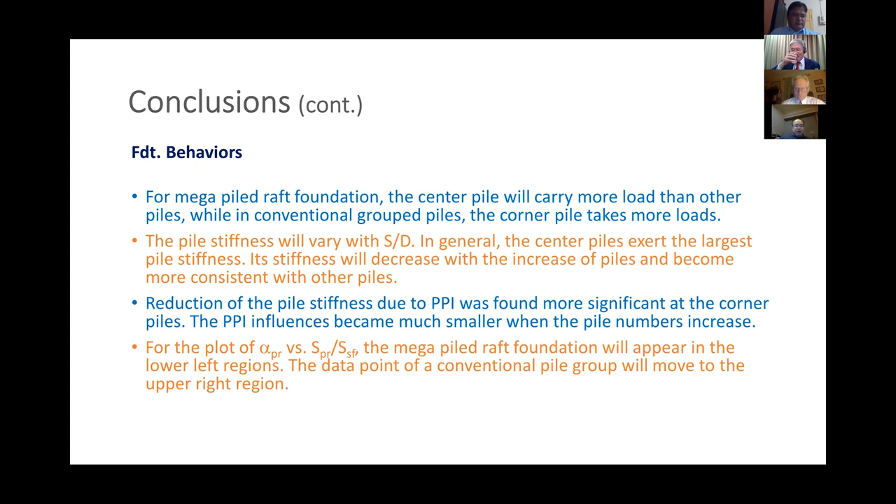Thank you very much for your attention.

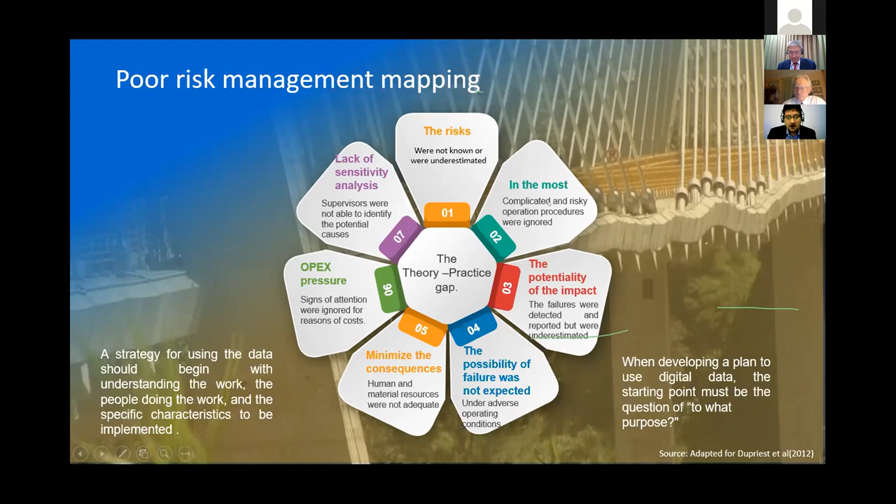In practical terms, accidents are the result of a combination of undesirable events involving latent deviations or failures and poor risk management.

As an engineer, there are two main activities: diagnosis and design. The diagnosis is based on the empirical and scientific knowledge that can solve the problem, while the design is the development of solutions to the problem to get an optimized result.

The engineer's essential function is decision-making. In this activity, he should tend toward the optimization of the system he designs. However, the dynamics of accidents start with bad decision-making. The scale of values on which established practice is based basically reflects the consensus of the profession.

Optimization is key to any engineering task. This is because optimization seeks the best way to achieve a particular objective or multiple objectives related to that process and the number of resources or other constraints.

In particular, the goal of many engineering operations is to reduce costs and deliver predictable results, results that meet the planned costs, schedules, and functionality.

To address the issue of the ethics of big data and process optimization tools, it is necessary to outline some aspects to consider in measuring performance and setting goals in engineering operations.

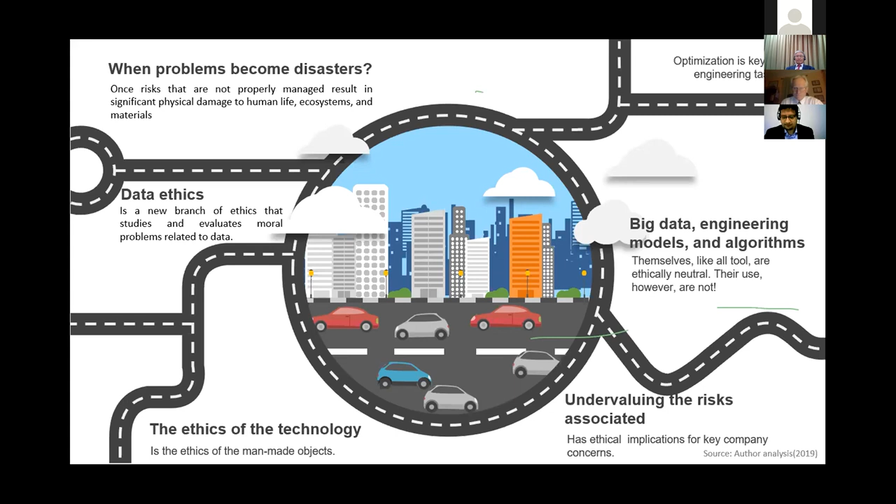Why are we measuring, how are we measuring, and what are we measuring for, before asking ourselves how we can correlate or how we can predict.

A mathematical model, in itself, has no morals. It is an abstract entity that belongs to the immaterial world. However, such a model reflects an existing or planned existence in the real world. The aim of this modeling is to solve a problem in that world.

Digital data strategies are most effective if they support deterministic physics-based decisions rather than statistical or historical practices. Model documentation is necessary to enable other researchers and modelers to reproduce the outcomes of the model. Indeed, reproduction, or its antithesis, falsification, is a basic principle of science.

At the beginning of this lecture, I comment there are enthusiastic voices indicating that this conjuncture is adequate to move forward in achieving sustainability goals and embracing the technologies of the fourth industrial revolution. As an engineer, I am convinced that there is always room to improve and encourage innovation in our processes. Certainly, the current moment is propitious to generate a revolution in the way of doing things, but we have to stop and think how we are going to do it.

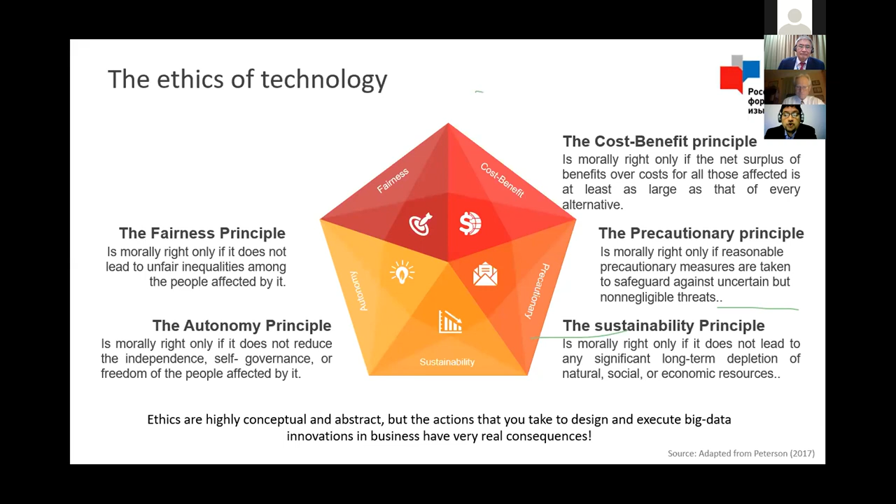Learning how to recognize ethical decision points and developing the ability to generate explicit ethical discussions provide organizations with an operational capability that will be increasingly important in the future. The ability to demonstrate that business practices honor their values - this is undoubtedly not the only framework that can help. Other organizational capabilities are required to support those business practices.

I want to thank the participants for their attention. Looking forward, I hope the use of ethical value frameworks will be considered from now on when using big data and data analysis tools. Data and correlations obtained must always be constrained with the reality of the processes occurring in the physical world. Professor Askar, I give you back the word. I hope I have the time to answer your questions. Thank you.

Thank you, Ramon, for a very interesting presentation. It was very interesting because, you know, the PhD students participated in our forum, and also from an interesting place, Ukhta city. So please, some questions or comments from our participants or invited speakers.

If no questions, I may have an academic question. Why do foreign students usually study in Moscow or St. Petersburg, but you study in Ukhta? Why?

Professor, thanks for the question. It's basically because my specialty is drilling, and I decided to move to Ukhta because Ukhta is an oil city. So I had the opportunity to work with the NIPI Institute that is linked with Gazprom, and to make research with them. That's the main reason I chose Ukhta.

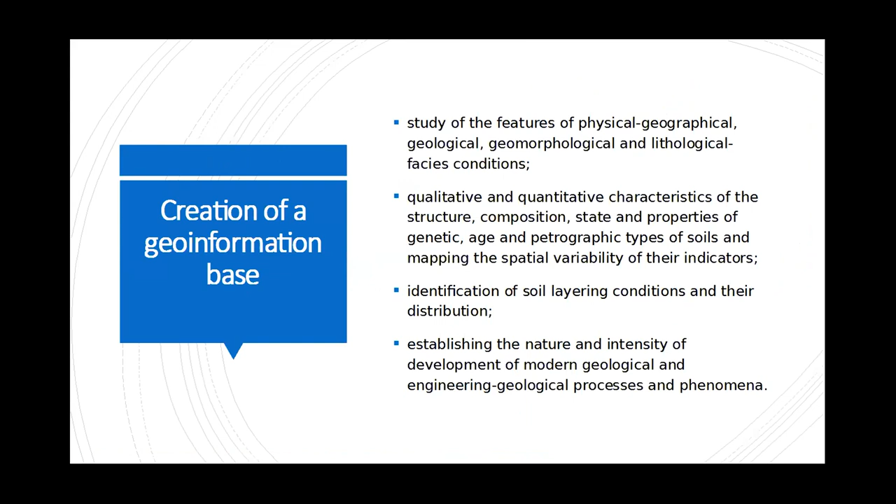Our program with the control system included a general management function, data input control function, data extraction and processing function, and also data padding functions, including different levels of soil ground.

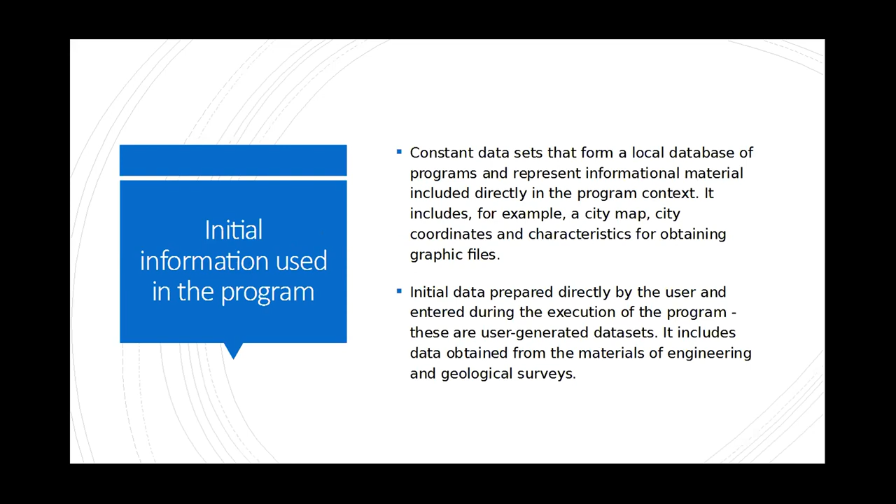This is also very good for each city, because each city already has some city map, city coordinates, and characteristics for obtaining graphic files. So we used these materials for preparation of the geoinformation database, including soil ground mechanical and physical properties.

You can see the creation of the geoinformation database using many coordinates, including the AutoCAD program, and also a database created in Excel. This geoinformation data input included, again, the XY coordinates.

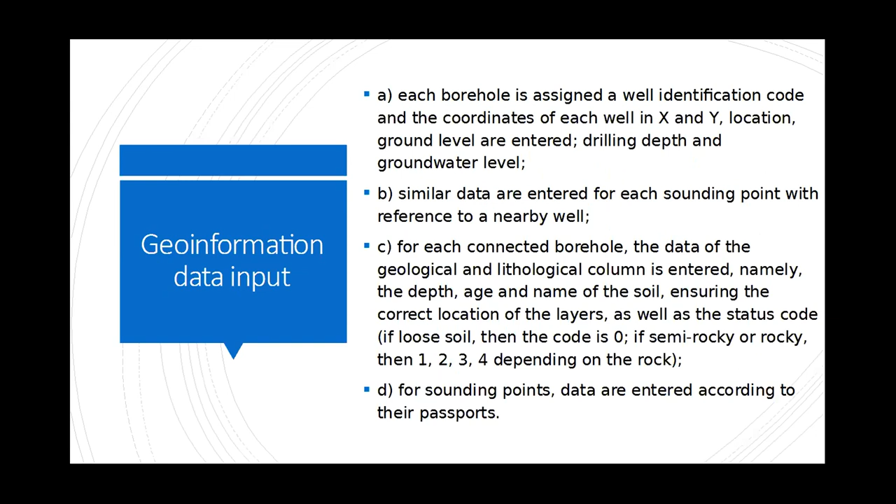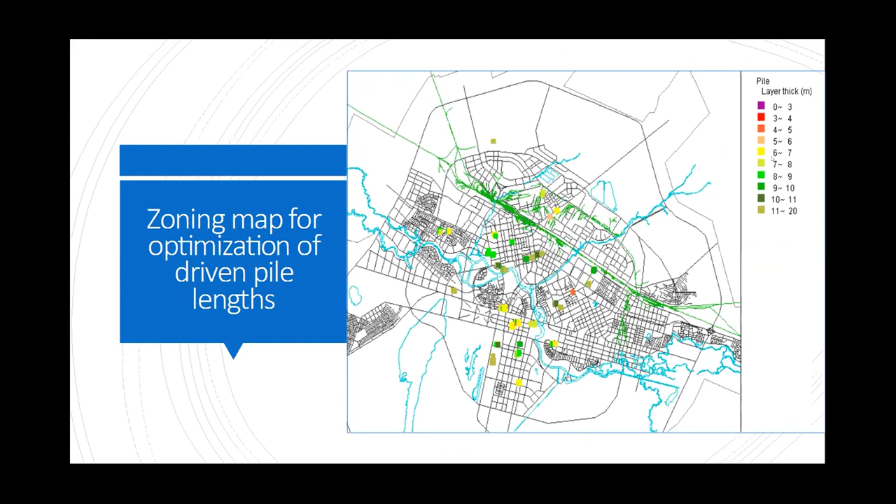You can see lengths of 7-8 meters, 11-20 meters, but anyway 7-8 meters, 8-9 meters is very popular for the soil ground of Nur-Sultan. We use these results especially for driving piles. Now we also want to use this continuously for boring piles, and in future also develop for traditional pile foundations like plate foundations, strip foundations, and isolated foundations.

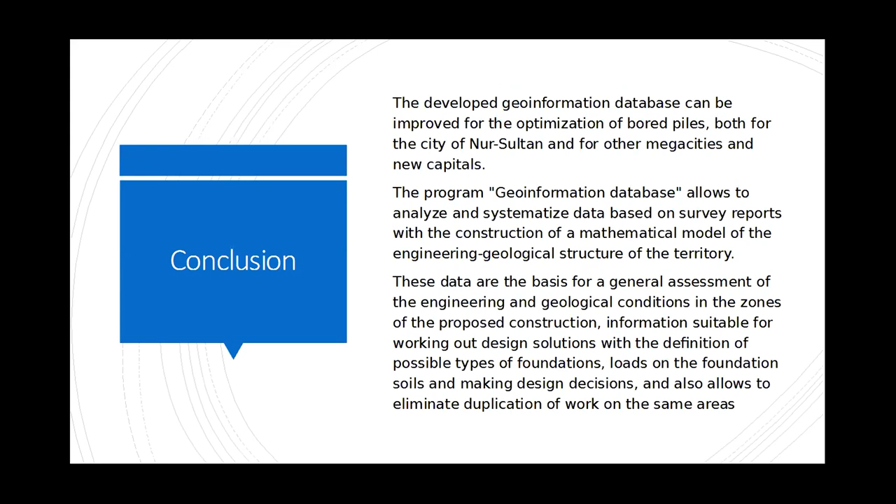So in conclusion, the geoinformation database is very good for preliminary understanding of geometrical parameters of piles without engineering geological investigations. Many companies are now interested because it's useful for preliminary understanding of geometrical parameters of foundations, which is very important for understanding geological parameters. After we decide on these projects, of course we will make more detailed investigations of the soil ground.

We want to develop this for Almaty city and going to West Kazakhstan. So thank you for your listening, and some questions if you have, please.